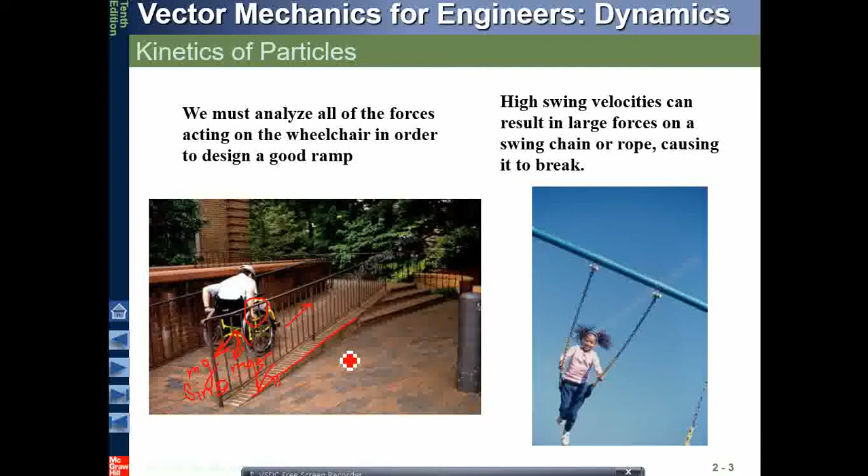So the analysis of force becomes very important. Now we know what is Newton's second law of motion: the summation of all the forces acting on a body must be equal to mass times acceleration of the body. And we know that the force should be in the direction of acceleration. So this is a force vector, and this is the acceleration vector.

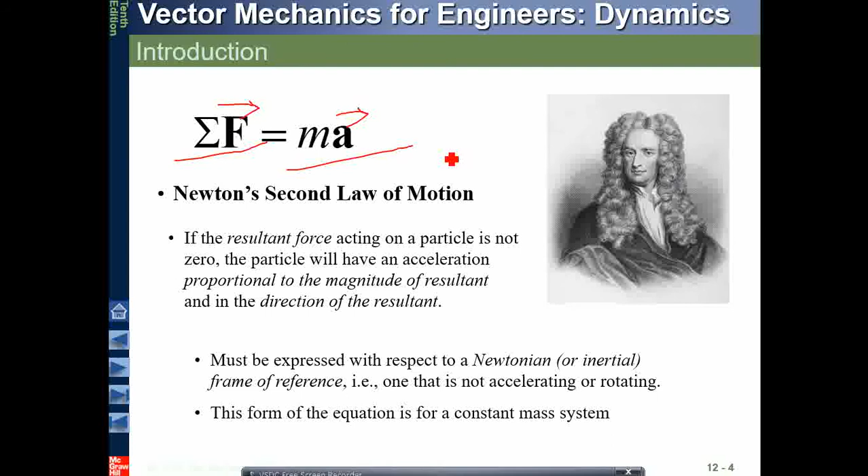We know about Newton's second law of motion. So what is something important about it? If we make some adjustment, like if we write the expression in a derivative form, we can derive another very important term known as momentum. Momentum is mass times velocity of the particle, so we call this mv as the linear momentum of a particle.

You must have studied about momentum in your physics classes, 11th and 12th. There it was a word used only as momentum. However, here we're discussing two types of momentum: one is linear momentum, which is experienced by the body when the body is moving in certain curves.

When the body is moving in certain curves, there is a linear momentum experienced by the body. And if the body is actually moving in some clockwise or anti-clockwise circular fashion, then the body experiences angular momentum with respect to the center. We will discuss about angular momentum in the later part of the videos, or at the end of this lecture.

The conservation of linear momentum is an important concept because it helps us solve dynamics problems in a way we already know - the statics way of solving problems. What was it? The sum of all forces acting on the body is equal to zero. We were able to solve such problems very easily, so that's what we'll do here too.

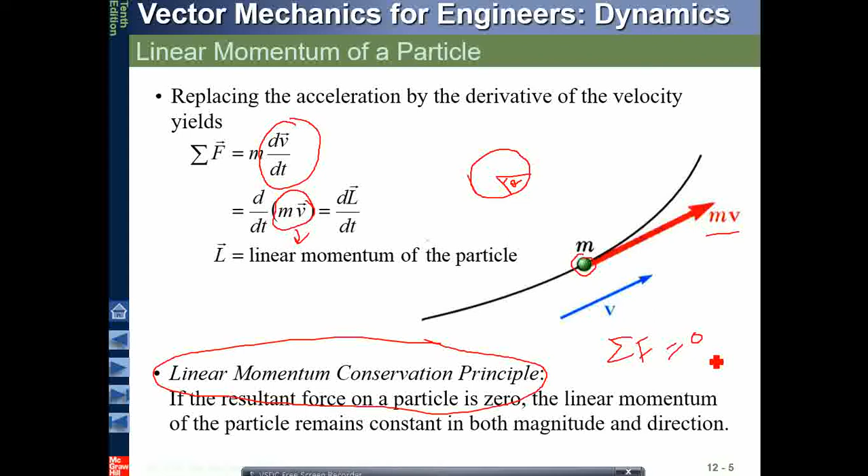We know that the force component will be along the x, y, and z directions - the force and acceleration components. Remember that mass does not have a component. Mass is a constant quantity, a scalar quantity. It does not have components.

Weight will be having a component along these directions. So weight may have a component, but not mass.

We have ax, ay, and az as the special components of acceleration along the x, y, and z directions. In a similar way, i, j, k can be compared, and the sum of forces along x can be compared to mass times acceleration in the x direction only. In a similar way, this can be achieved in the y and z directions also.

As I said, we'd like to solve the dynamic problem in a static way. In a dynamic problem, there will be many concurrent forces. So what about transferring the ma to this side of the equation and writing it in this form? Since ma is also a vector, we'll put one vector for the ma too. This also becomes one force - F1, F2 and minus Ma will become another vector, and we call this vector an inertial vector.

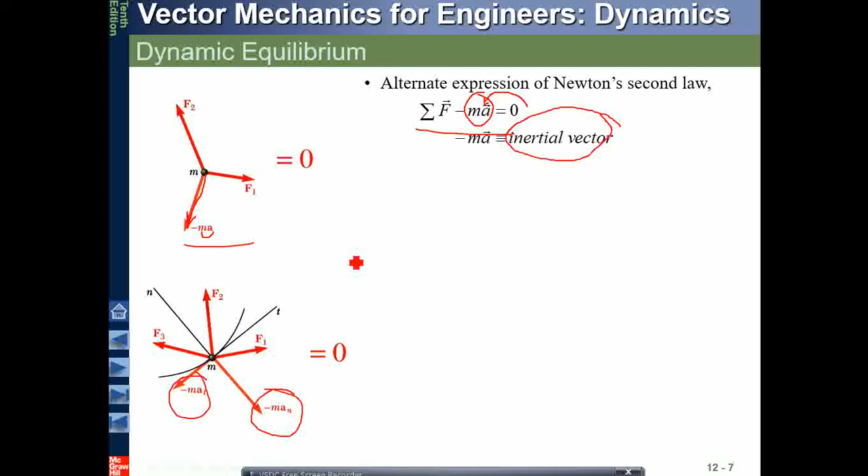Apart from the forces, in the dynamics part we'll have another component known as an inertial vector or inertial component, in the x and y directions, or in t or n directions, or in r theta directions. This is the additional component.

So now, the important thing here - what is the advantage of doing this? One advantage is that I can use it in a static way. The resultant of f1, f2 and f3 will form a closed polygon, like we used to make in statics while solving problems.

When we made the closed polygon, it meant that by summing up all the forces the polygon becomes closed, and that means everything is in equilibrium. So we can achieve equilibrium by doing this. Apart from using the statics way, we have also achieved an equilibrium part.

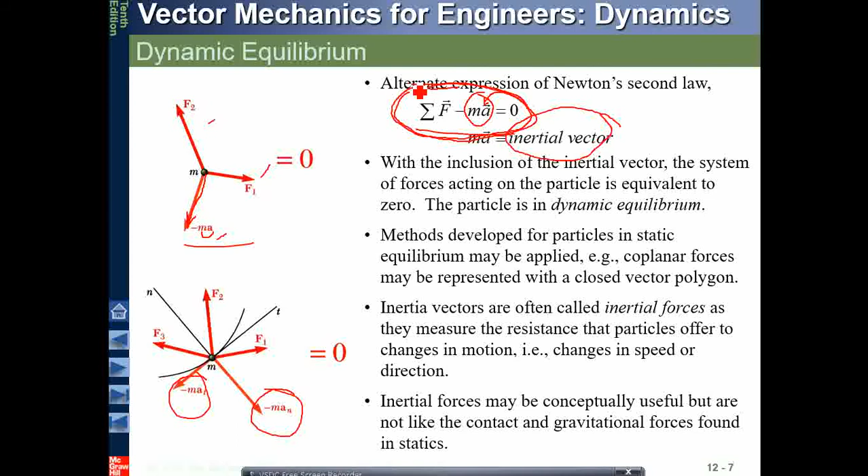So now we know that these are all inertial components. We'll try to see what a free body diagram is and what a kinetic diagram is. These two will be important - we'll compare a kinetic diagram and a free body diagram.

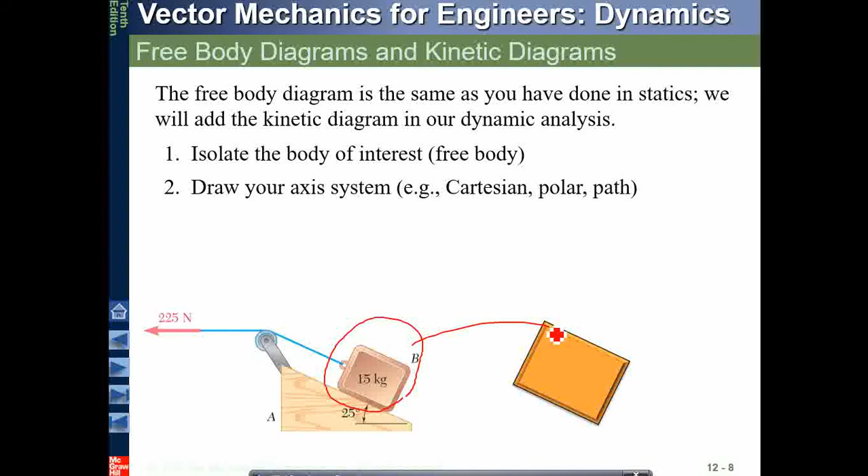Like in this example, a block is there and we are trying to pull the block out on the slant. First we isolate the body - what is the body in interest? This is my body in interest, body B. I'll isolate it. The next step will be to draw your axis. We've drawn the axis, then we apply the forces.

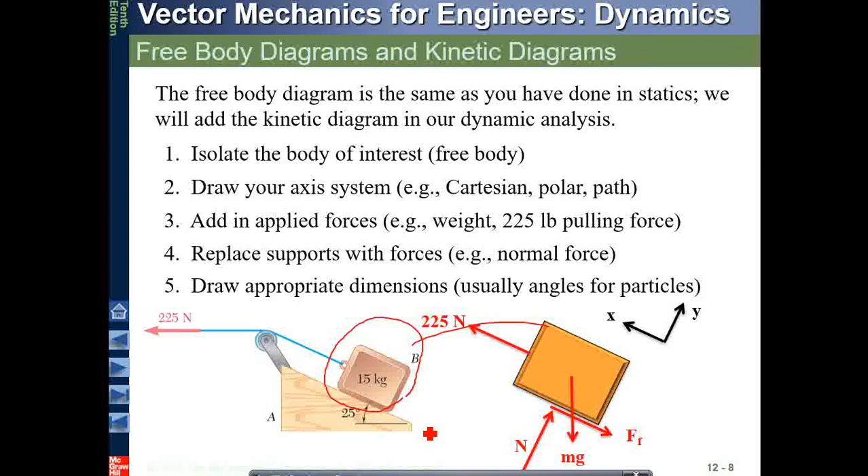So what are the support forces? One is the normal experienced by this block, and another one is the friction force. And if there are some dimensions of the block, use that in this way.

So now once this FBD has been made, we will put the inertial terms and make a kinetic diagram. This is how a kinetic diagram is made. This is a free body diagram, we have made it in a proper way. Now we'll make a kinetic diagram. So this is the block we have taken, and the important thing is the movement, and movement is what is required in a kinetic diagram.

So the movement will be MAX, one component along the x direction, another component along the y direction. This is called a kinetic diagram of this free body diagram, and this will be equal because sum of all the forces acting on a body is equal to mass times acceleration. This is what we used to do - we make a free body diagram and equate it to the kinetic diagram.

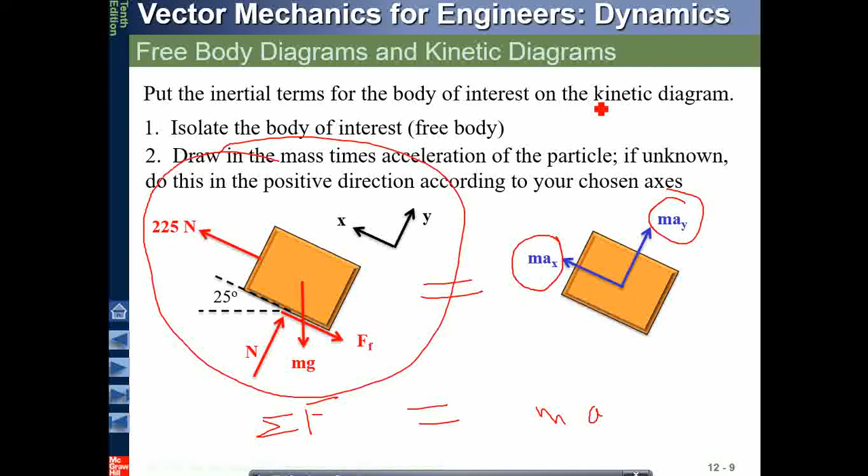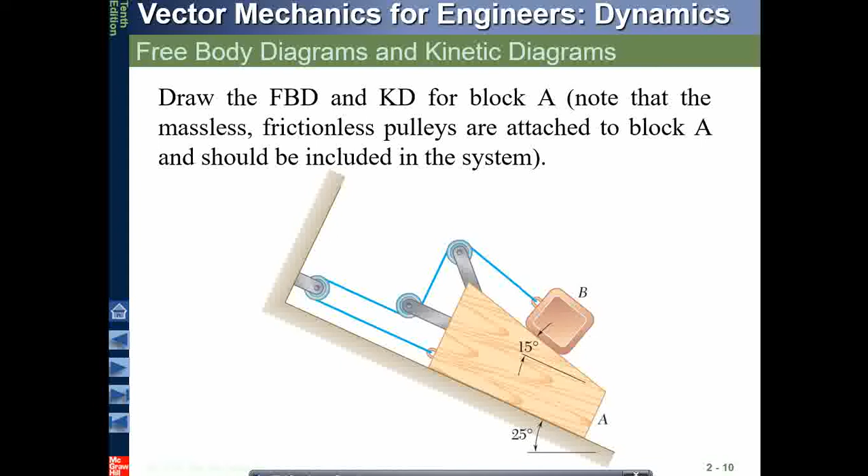So as I said, we would draw the FBD for block A, block B. This is a new situation to you. First of all, isolate the body. Second, put the axis, applied forces. This is the only applied force, mg, weight of the block. There are no other applied forces, remember. As you can see, no external forces are there - these are all tensions.

So further, replace support with the forces. We have support, replace the support with the forces. Friction forces there, support forces there, tensions are there, all these things are there. Dimensions drawn, kinetic diagram - this is what the kinetic diagram looks like.

Now when I write the component MAY equals to 0, that means there is no movement of this body along the y direction - there is only movement along the x direction. So I have to write this because I have written MAY equal to 0, though I would not need to make this arrow and write these things. Only this component will be active because the slide can move in the x direction only. So this is how the kinetic diagram and the FBDs are made.

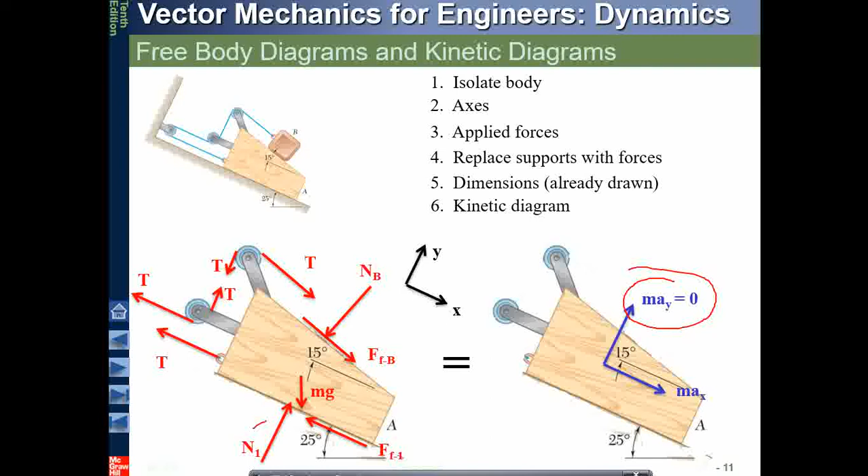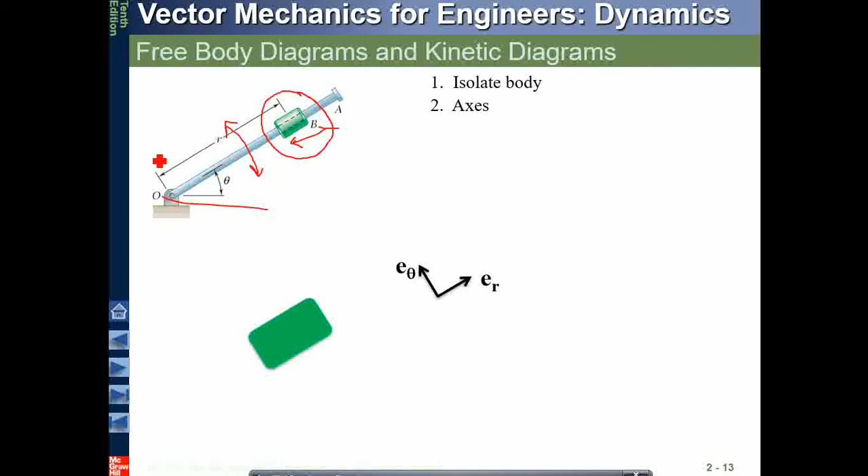Another problem is there, and we need to find the FBD and KD. So now the only body in picture is body B. We've isolated the body, put the axis. We will work on r-theta coordinates, because as you can see, this lever can move in these directions - this can move here and B can move in these two directions, up and down along this lever. So r-theta will be the most appropriate coordinate system, because if you use xy, how will you trace the theta orientation? You will not be able to trace it. Any applied forces? So mg will be the only applied force.

Support reactions: one is the friction force you will experience while moving upwards, and another one is the normal force. Any dimensions we have placed. Now what will be the corresponding diagram? So MAR, one component here and another theta component. Now I hope that now you have understood how to make the FBDs and kinetic diagrams.

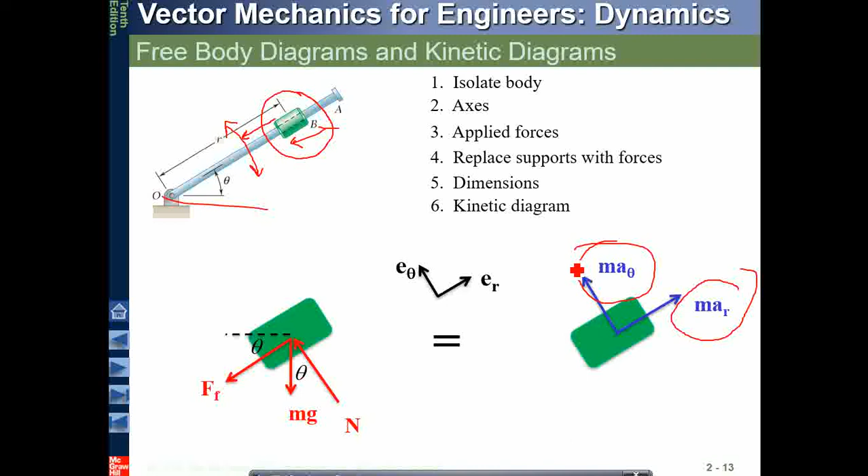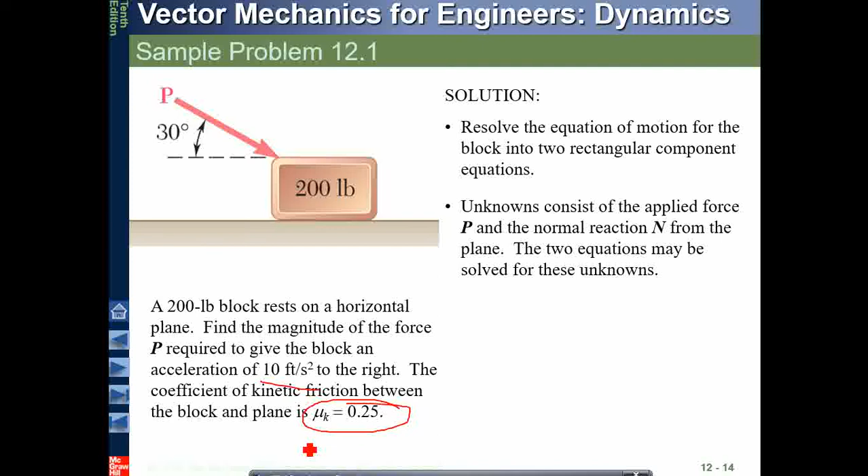So which are the components? First is P cos theta, horizontal component, and minus 0.25 N, which is the friction force. So these are the two - one is this component, another is this component, both are in opposite directions. This equals to MA. M is this, A is 10 feet per second square given. So these are the two unknowns.

Another equation is for the y direction. There is no component of acceleration in the y direction, so that is 0. So N minus P component, mg, P sine theta, and the weight of the block also should be subtracted because it's against the y. This is all equal to 0. So two equations, two unknowns, we can solve it easily, and we can find N and P.

Okay, this looks very simple, and it is a simple problem, but the important thing is the application of this inertial component in the equation. This is something new for us and important here.

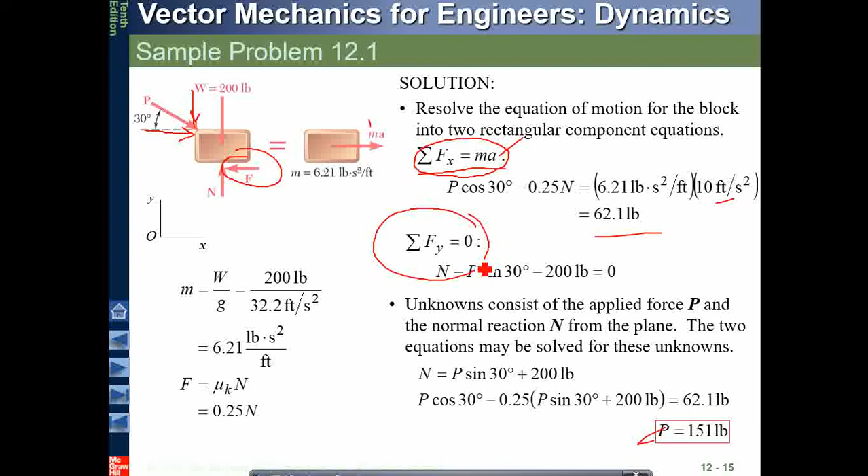Since there was no acceleration component in the y direction, we have not taken it. Since there was an acceleration component in the x direction, we have taken it. If this would have been a static problem, we would have taken fx equal to 0, and the problem would have been solved similar to how we solved the statics problem. So this is something very similar to what we have done till now.

Another problem: two blocks that will move, starting from rest, and they are being pulled by using a pulley. Determine the acceleration of each block and the tension in the cord.

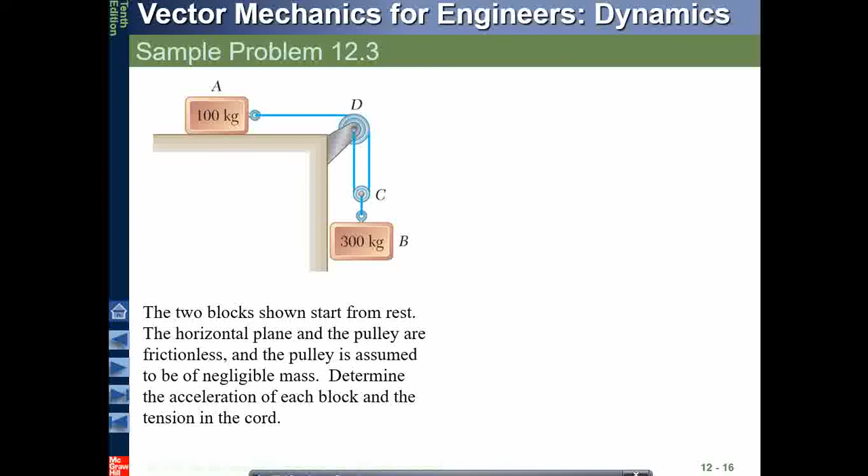So the basic thing is to draw the FBD and kinetic diagrams. We have drawn first of all the FBD only along the x direction. We have seen that this is the FBD: weight of the block, normal, and tension. This is equal to mass times acceleration. So there will be one acceleration of this block, another acceleration of this block. One acceleration in the x direction, another in this direction.

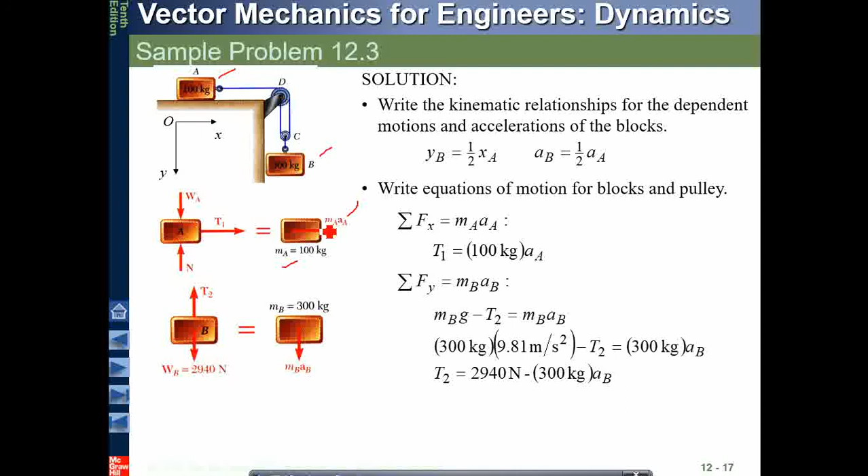So summation of the same thing we have to do. Take the forces: tension equals mass times acceleration, and this is also equal to mb g. Remember that the acceleration in the b direction is the gravitational acceleration. So this is set as mb multiplied by g minus t2, tension here, being pulled, mb ab. So this is solved and T1 and T2 are obtained.

Now AA and AB are remaining, so we will add one more equation. Very important to notice here that the other part that we have involved is the C part.

See, A will move and B will move, but remember that B and C will move together. So A will move and B and C will move together. So you do not have to solve the equation for B and for C separately. It is not required to solve the equation for C.

But we are solving here the equation for C. Why? Because when we have solved the equations for X and for Y, we are still having two unknowns. So the system becomes indeterminate because the number of variables is more than the number of equations. So we know that there is a relation between A and B.

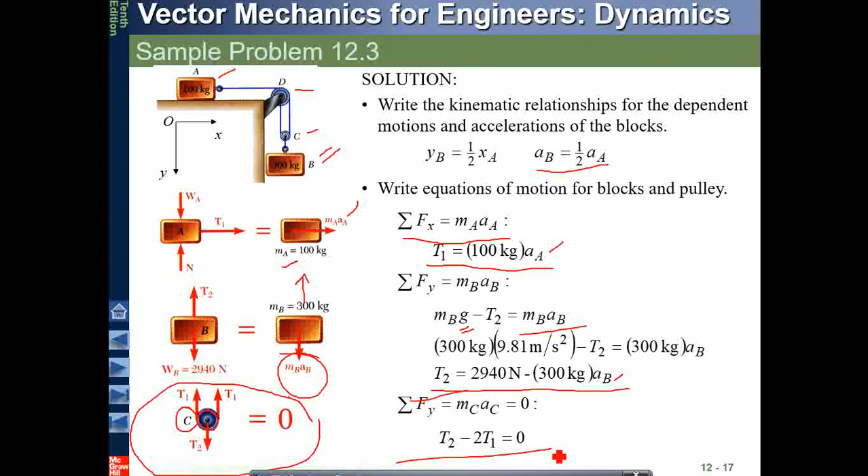There is a relation between them: this length is half of this length. So since there is a relation between the expressions, one equation is reduced, so we need actually one more equation. Since three variables becomes four, becomes three, we need three equations. So additionally we solve this to find one more variable by taking one more equation. Due to that, we were able to solve this other situation using these two equations, and we were able to solve the four variables that were required.

So you have to put your thoughts on this, and this is an important problem, why there is a requirement of another point to be seen.

And remember that we cannot use point D because D is fixed. There is no movement of this D point. So there will be no forces, there is no mass here, so the acceleration part and something will not be there. There is no movement of D.

So it is important that we will only select point C. And further, the C point is also having a direct relationship with body B. There are two tensions here and one tension here, so this is actually comparing. However, here there is nothing—this is actually fixed and this is related to this. If you relate these two, you will not be able to actually. So it's important that we should take C as a point in the additional equation.

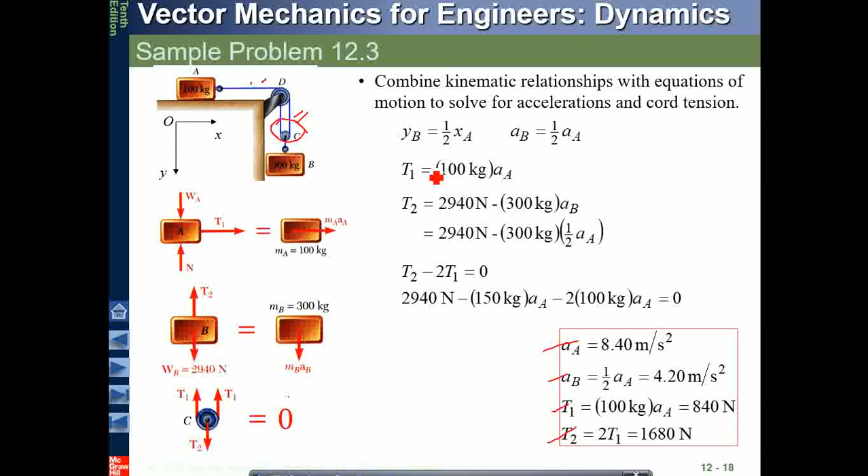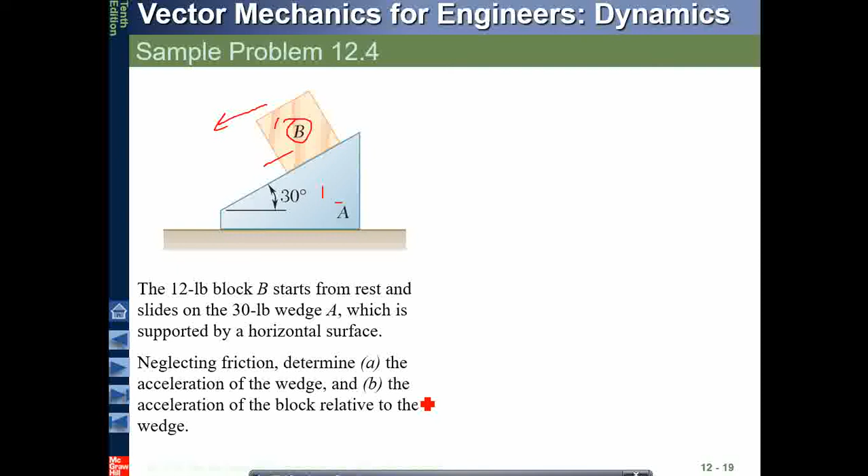Again, this is one more problem. We are doing a lot of problems in these lectures. This is one block of 12 lb which is moving on a wedge. This block is actually moving on this wedge. We need to find the acceleration of this block and this block. Remember, when block B moves, it may also at the end push A. So we need to find the acceleration of this and the acceleration of this—these two. So first of all, draw the FBD.

Okay, draw the kinetic diagram. So this is the FBD and the kinetic diagram. Simple FBD, normal reactions, weight, and remember there are two normals because there will be one normal experienced by this on top and one its own normal compared to the acceleration.

Only acceleration in the horizontal direction. So we have solved this, obtained this equation. Another case for the block only. The block will experience only one normal because on top of the block there is no weight or anything. One is WB, its own weight.

So we'll be having one component along this x direction and one along the horizontal direction, which is at 30 degrees. So just put this along the x, we'll put cos 30 degree here and try to solve this.

And it is important to see this figure, that the acceleration of B is a relative acceleration because both are dependent on each other. So the acceleration of B is actually relative to A.

We have discussed this as a position vector in our previous articles - what is the point A, what is the movement of A, movement of A plus the relation between the two. What is the relative vector?

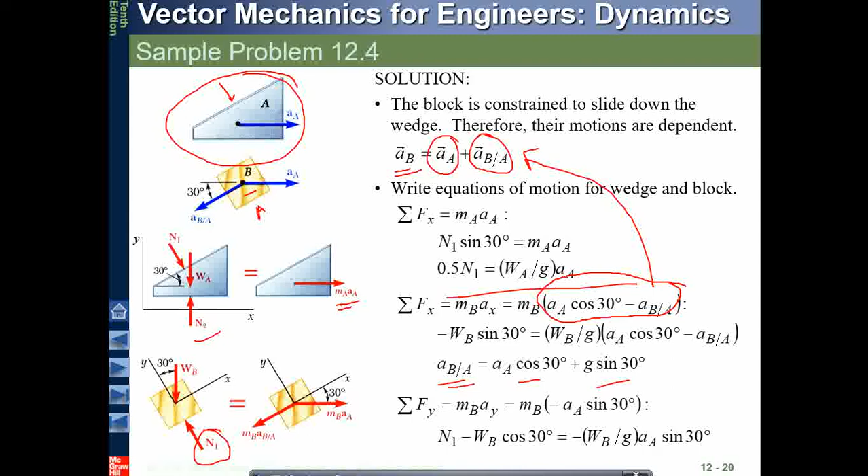These are very simple and straightforward problems. Only basic mathematical knowledge is required of the components, and that you have already gone through in your previous lectures. We have already gone through how to sum up the forces, what are these components - they do not need to be repeated again and again.

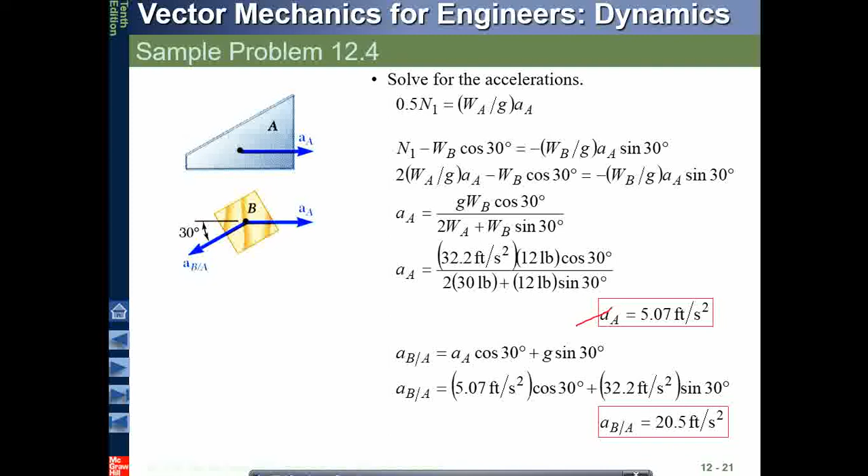Okay, and then the relative vector, acceleration of the relative vector BA. This is another problem in which, if you see this problem, I can remember this.

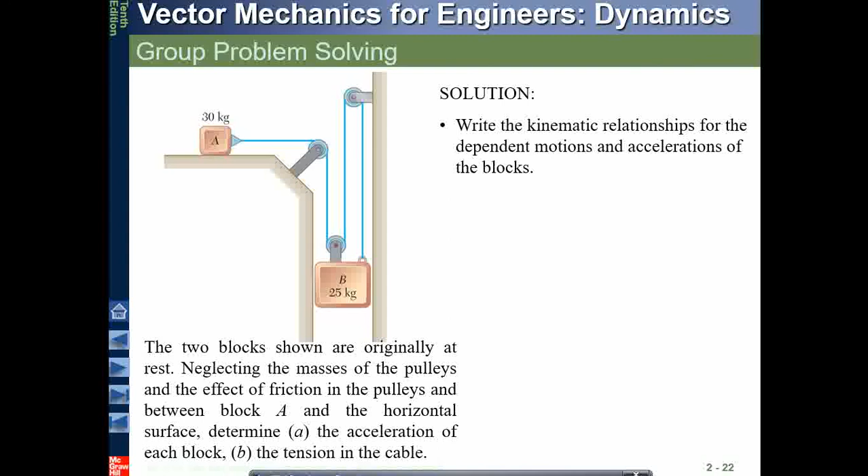We have already solved this problem in the statics part, and we have put the constraint. Yes, we have solved this.

So this was the XA and this was the XB, and we have put in an equation with the constant: XA plus 3YB. We have solved this earlier. This is the distance XA and this is 3YB. Why is this 3YB? Because this is 1YB, 2YB, 3YB plus constant.

These are the constant lengths, not needed to be required, equal to the total length of the string. Total length of the string.

Now we can differentiate this twice to obtain the acceleration. So this is, we have differentiated and obtained the acceleration component. Already we have done this, but we have not differentiated it twice to obtain the acceleration component - this we have not done.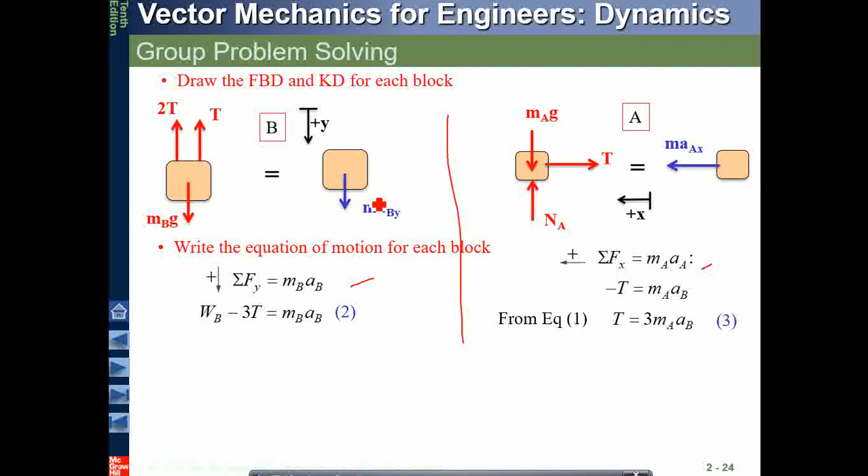Equation of motion for B, equation of motion for A - sum of all the forces along the Y, sum of all the forces along the X. So the acceleration will include that.

Okay, and solve these equations. Just solve them simply as you know how to solve them and obtain the acceleration. These are very simple, straightforward problems.

Just you have to keep the concept with you all the time, what you are doing. If there is a movement, just try to put the acceleration component. If there is no movement, remove the acceleration component. And the component of acceleration should be along the axis chosen to define your problem.

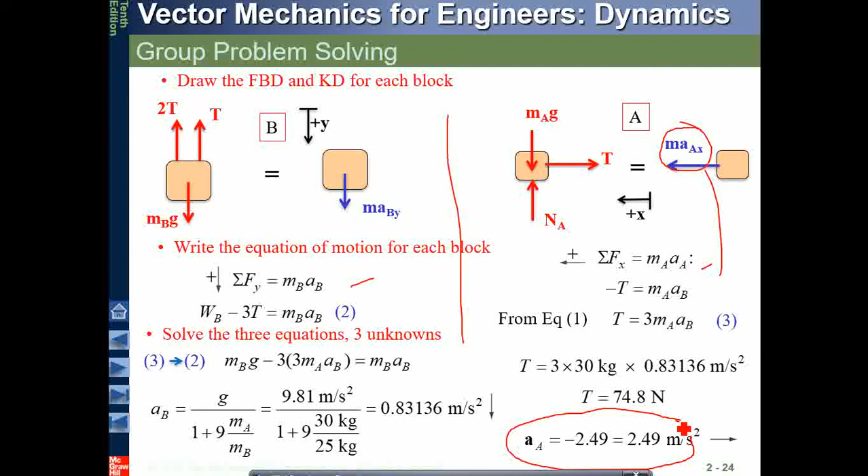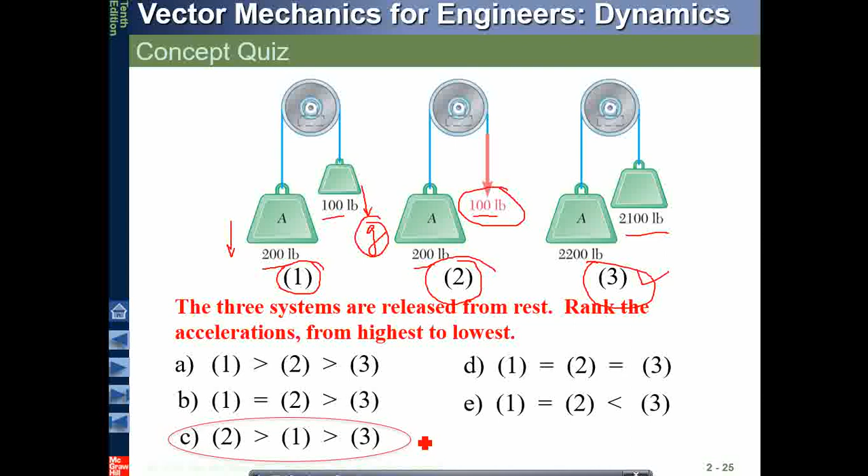I hope the reasons are very much clear to you. So this is how we should solve or conceptualize these problems.

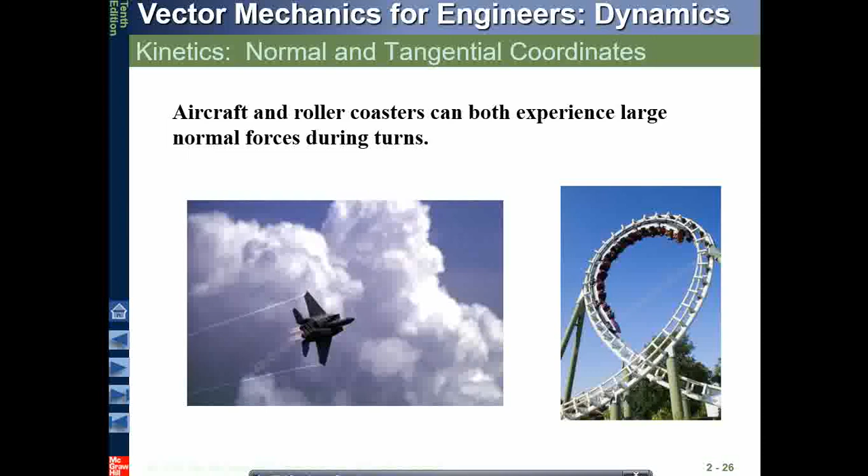Now the same F equals ma will have normal and tangential components also, and we will see some of these problems in other coordinate systems. This is Newton's second law of motion in the tangential and normal coordinates. We have already discussed the tangential normal coordinate system - this is the tangential coordinate, this is the normal component. So when forces have a component, why not accelerations? Acceleration will also have a tangential and normal component.

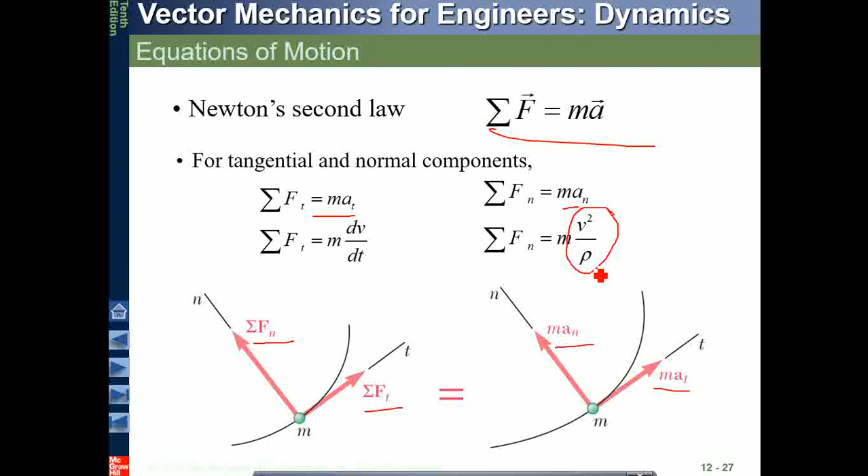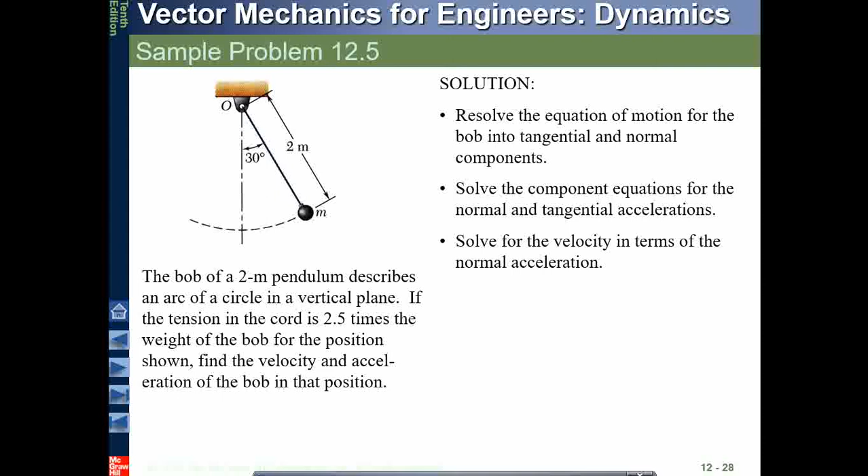So first we define the FBD - the tension, the weight - and this is the kinetic diagram, which will also have components in the n and t directions. Sum up AT and find it out. Very simple problem. Then the other one, AN, sum it up and find it out. We have to solve for the velocity, so AN will have a velocity component, v squared upon rho, so we will be able to find the velocity.

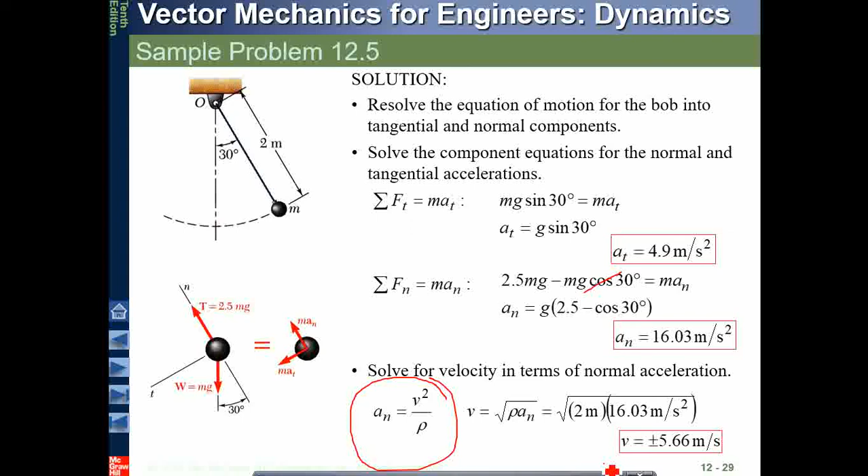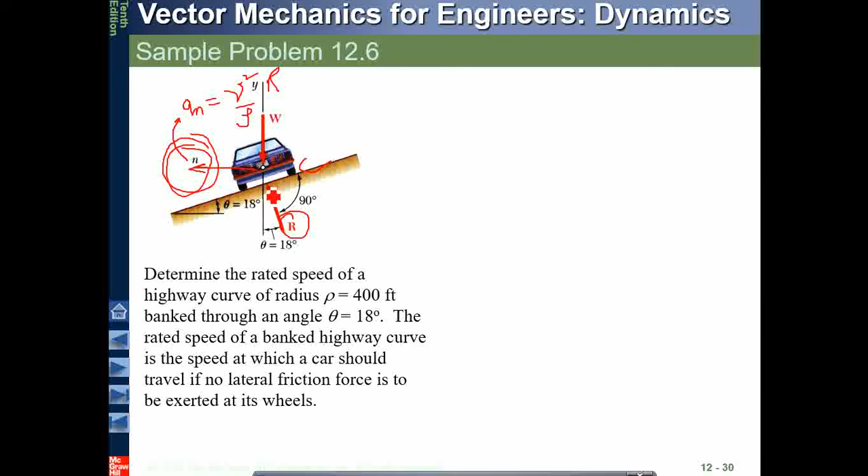And remember that this is reaction force, not curvature. There's a reaction force coming up here. So you have to find the velocity. Let's see how this problem is solved.

So the dimensions, everything we have written, this will be the ma_n. Remember, this will be the momentum of the car, how much momentum you will see in this normal direction. So this is the FBD diagram, this is the kinetic diagram, and we will try to solve this.

Sum of all the forces along y, only W we have, and r cos theta component along this. So we have one relationship. In the other case, we have the normal component: r sin theta, m times an, and we'll have a relationship with the velocity. So we'll solve for the vehicle speed, and we'll be able to solve it.

Remember that we have taken this n because we need to take the advantage of the normal expression of the normal acceleration, and r will be along this only. That's why n and t, tangential velocity, will be tangent to this. So the tangential velocity will be facing tangent, while this will not be tangent, this will be y, any other vertical direction. So it's the normal direction and any other vertical direction.

So in some specific problems, if we know the concept, we could also involve two coordinate systems together. Like in this problem, we have added, or combined, the two coordinate systems together.

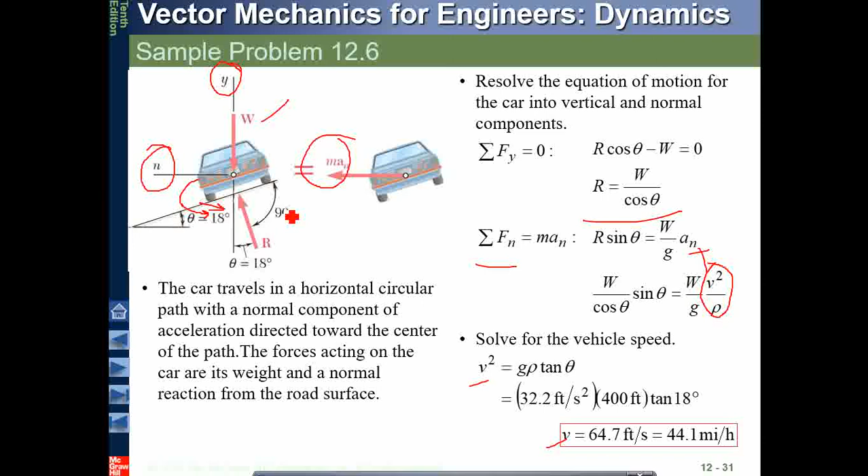Remember that x is also there. Where is x? This is in this direction, and y is also there. X is in this direction because this is a frontal problem, so I could not make it properly. This is y, so this will be x, and the radius will be this. So what is n? N is this.

Let's assume the car is moving along this direction, so the tangential velocity is this. This is x and y, so x becomes almost the same as n.

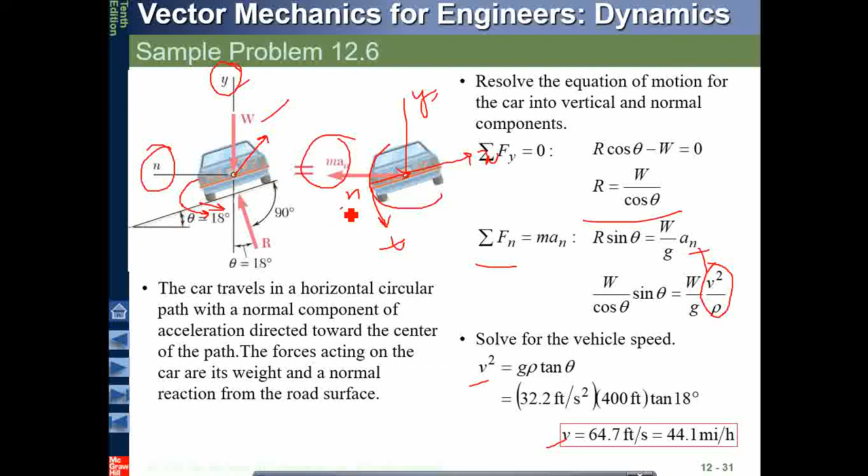If you have taken n instead of x, tangential t is not required because it's not even asked and it has no role here. So only n and y have a role. So we have both coordinates included here, but we have taken the best of the two, and that is how we have solved the problem.

This is another concept where we are driving the car and you have to draw the acceleration on these paths. I request you to do it by yourself. This is our basic problem, and this is how the acceleration works. Just see what A, B, C, D are saying about acceleration, and try to draw them by yourself.

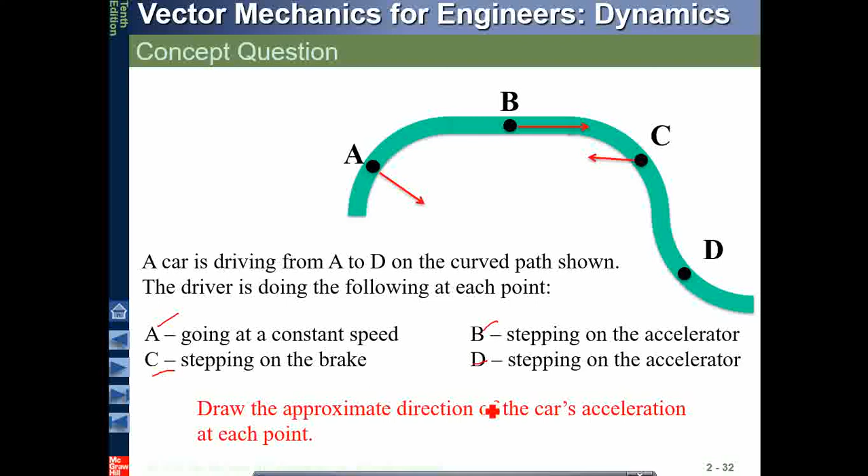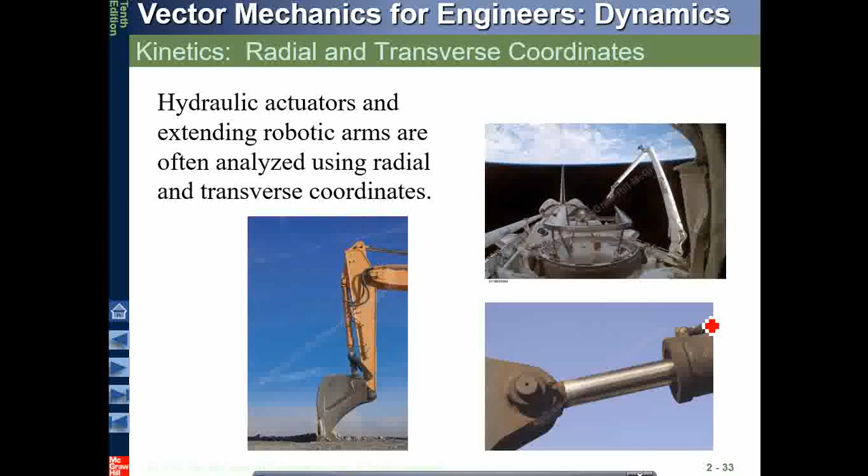Now, another kind of coordinate system, as we know, with curvilinear features: radial and the transverse component. We will not discuss this too much because you already know about radial or polar coordinate systems.

So we know that the polar coordinate system is like this: Fr equals ma, and what is acceleration Ar? In the previous lecture we discussed r double dot minus r theta dot squared. You have to remember that, learn that, keep this in your mind. What is AR? AR is this.

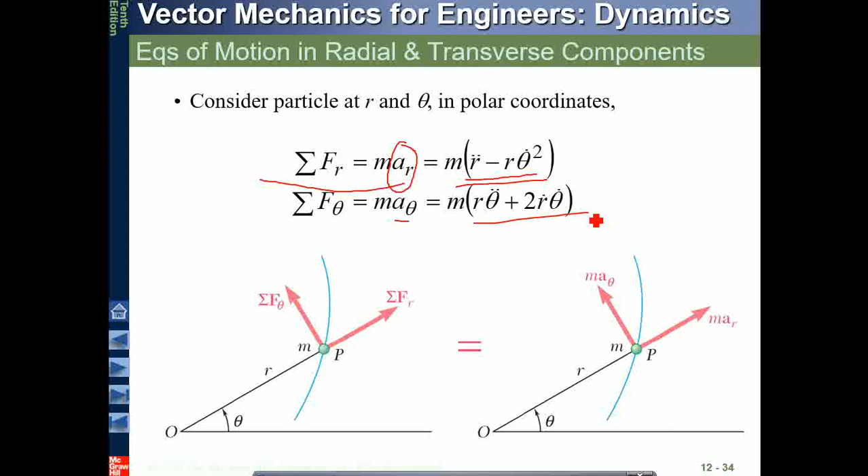And a theta is this, because this will be used in the problems. While solving the problems, these will be used. So we'll solve a problem on this.

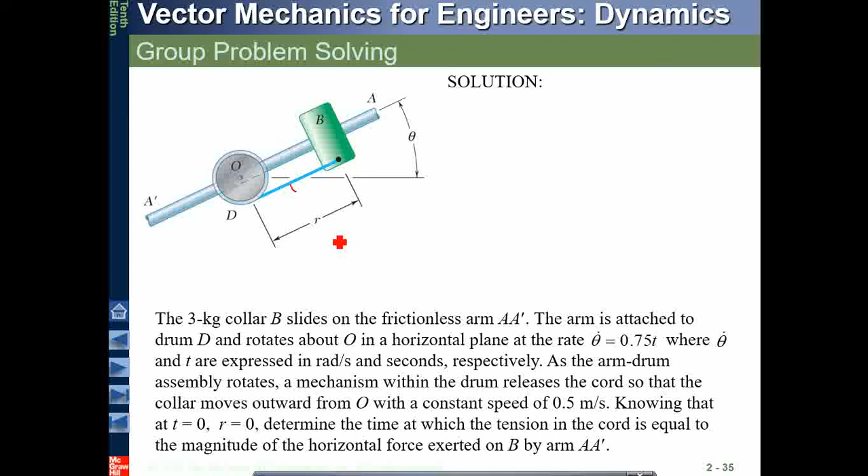This is one kind of collar which is being pulled and pushed by a string, arm attached, and this is a drum which, while rolling, brings this collar closer to it, and while releasing, brings this collar opposite to it. So simply you can use the r-theta coordinate system, a polar coordinate system, and try to make the FBD and KD like this and try to solve it.

This is already given. I request you to do it for yourself. Write the equations of motion as you have written.

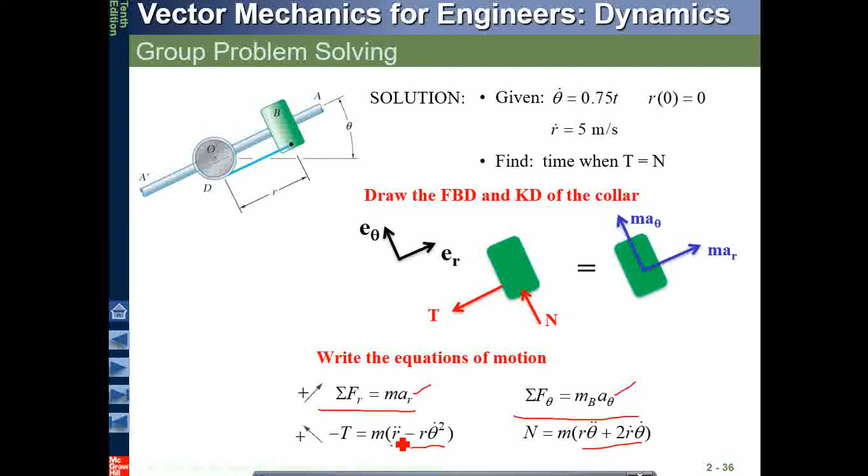Similarly, as I've been told many times, since you are using r and theta, replace them with a r and a theta, and put these into the equations. Now you require r double dot and theta double dot. Just obtain them. How can you obtain the expression for r and theta? This is already given: theta dot equals 0.75 t.

Differentiating it once, we will obtain theta double dot. R dot, that is velocity, is given as 5 meters per second. Obtain r by integrating, and then just substitute it into these equations already given to you, and obtain the required expression at time equals 2 seconds.

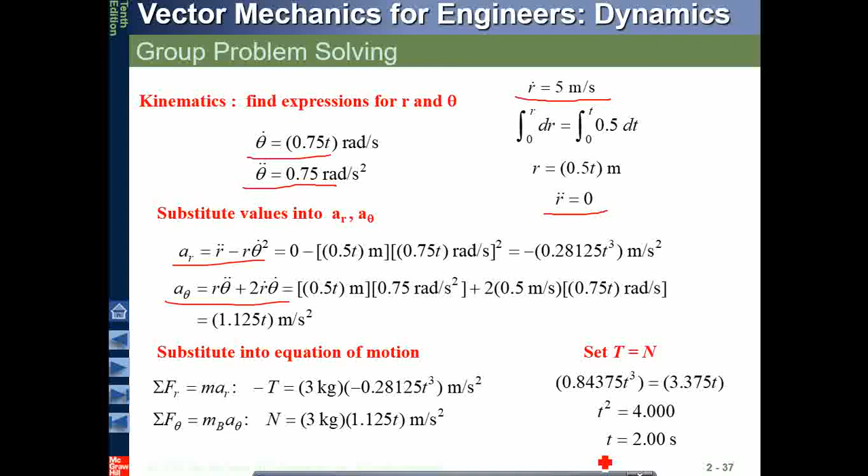So just do it for yourself. This is a very easy, self-explanatory problem.

Okay, a conceptual quiz. We'll discuss this quiz. A girl starts walking towards the outside of this spinning platform. This is a very famous...

jhula of children. You might have seen these in a park, where people used to actually run in this curved form, and then jump onto this prop. So they used to run or walk in this curvature. This is what the girl is doing, walking around this spinning platform as being seen.

She is walking at a constant rate, which means there is no acceleration. Her rate of movement is constant with respect to the platform, and the platform rotates at a constant rate also, which means there is no angular acceleration. So no angular acceleration, no linear acceleration, but the velocity is there.

So in which direction do the forces act? Very simply, one is along the tangential direction, along the e-theta direction. And what will be the other force? One force is her trying to push against the platform, trying to give her force to the platform. So at each and every point she'll be having a tangential force.

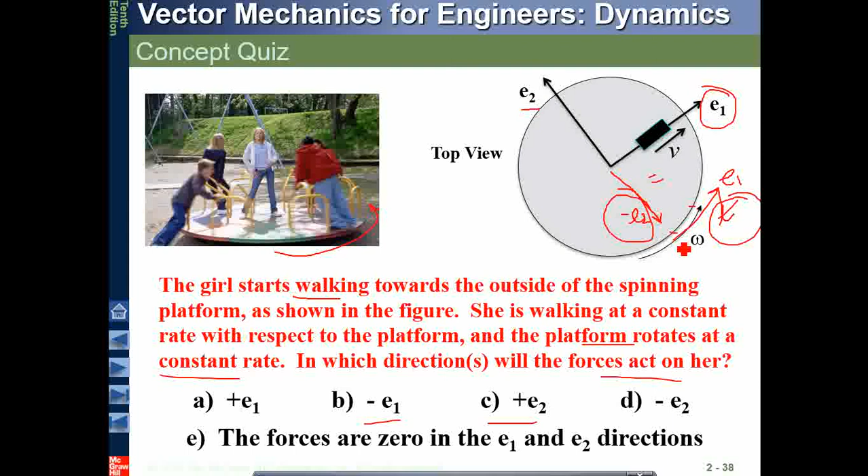This is very much similar to Newton's third law of motion, which says to every action there is an equal and opposite reaction. Something very similar, actually, that is what it is.

Okay, now before we close this session, we'll give a very brief introduction about angular momentum of a particle. This angular momentum is experienced by satellites which move around the Earth's orbit, so they move with an angular momentum.

Remember, there is something called angular velocity, and in a similar way, we'll talk about angular momentum. So angular momentum is mass times velocity in an angular fashion. This is the Earth as you can see, and the satellite used to move all around the Earth.

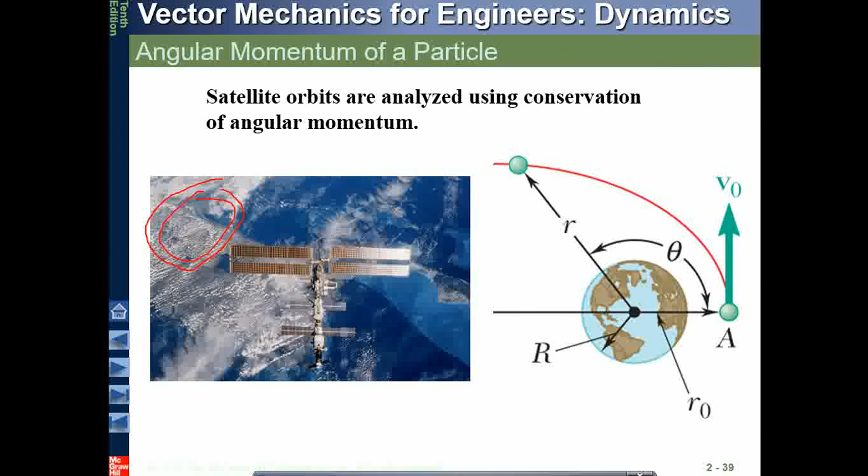So the angular momentum concept becomes important. And what exactly is angular momentum? Angular momentum is your radius times mv, the moment of momentum. So momentum is mv, and we have taken the moment of this momentum times r, so this becomes angular momentum.

Remember, we have a linear momentum which traces the particle, the tangential part, mv will be there. In this case, for example, this is the particle, this was the tangential mv. So mv is the linear momentum, and if you take the moment of this momentum, that means r times mv, which is on one plane, there will be a vector perpendicular to this plane, and this is called the angular momentum of a particle, represented by H.

And this H will be having a magnitude. We know that r mv sine theta will give its magnitude. It can be solved using a simple determinant equation with i, j, k. Just write it in this form like we have done earlier while doing the statics.

And similarly, the angular momentum mv, as the linear momentum has components mvr and mv theta, angular momentum will also be having components mvr and mv theta, and it can be added also, like we have added the vectors. So there will be many angular momenta, summation of all the angular momentum at a particular point.